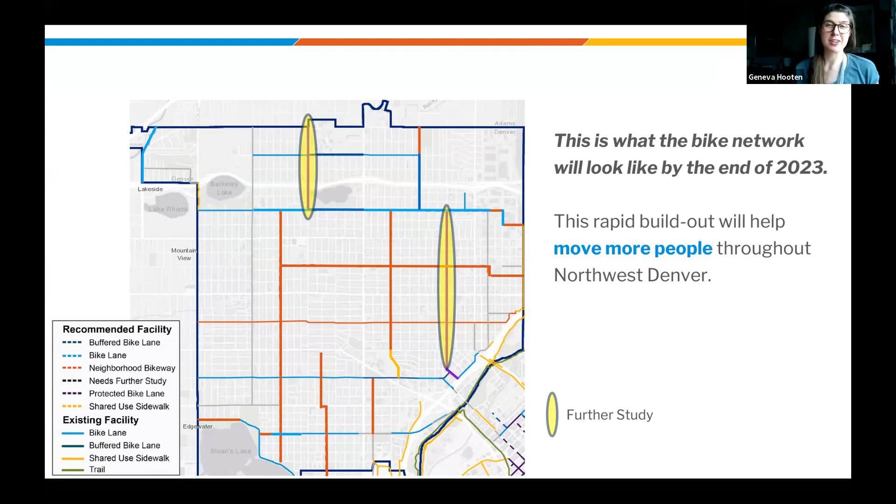Ultimately these are multimodal plans, but we have a ton of bike projects. This is what the bike network in Northwest Denver is going to look like by the end of 2023. And what the bike network looks like today is a lot less than this. So we're really excited about really building out a network for people to get around.

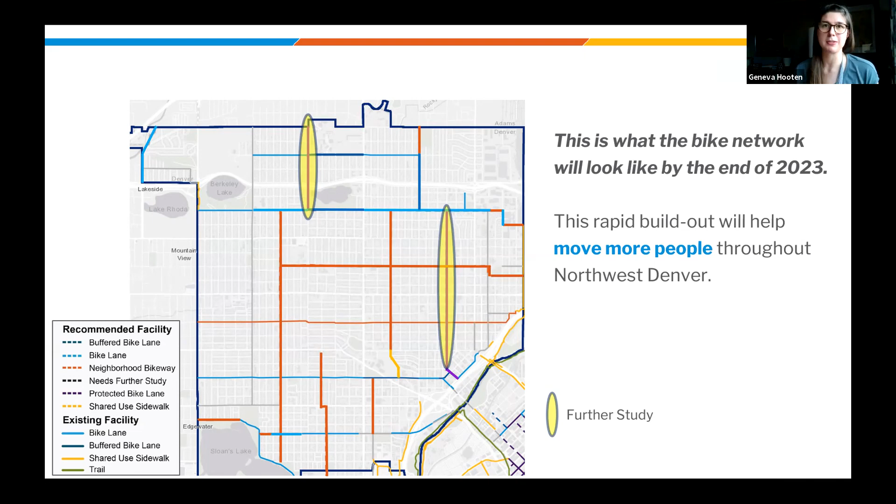And as we are working through all of this, our goals are always to be creating a safe city, part of Vision Zero of eliminating all serious injuries and fatalities across the city by 2030. We are working to prioritize multimodal projects. We want to rapidly deliver high comfort bikeways, provide more travel options for people to get around, so that we can better fit all the people who are moving to Denver and who deserve good ways of getting around the city. And we ultimately want to move more people.

So tonight I am going to just be walking through a couple of the corridors. For those who were at the North Zuni meeting earlier this week, a little bit of this is going to be repetitive, as well as if you were at the April 7th meeting. But we do have a few new things to share.

So first, we want to talk about West 46th. So this corridor, we have a bunch of different facilities going in. Starting at Tennyson, it's a bike lane, then it becomes a buffered bike lane, switching to a bike lane again. We have another very short segment of a buffered bike lane just east of Pecos, and a block of a neighborhood bikeway turns to Lipan, it's a bike lane, and then it's a neighborhood bikeway for the very last few blocks.

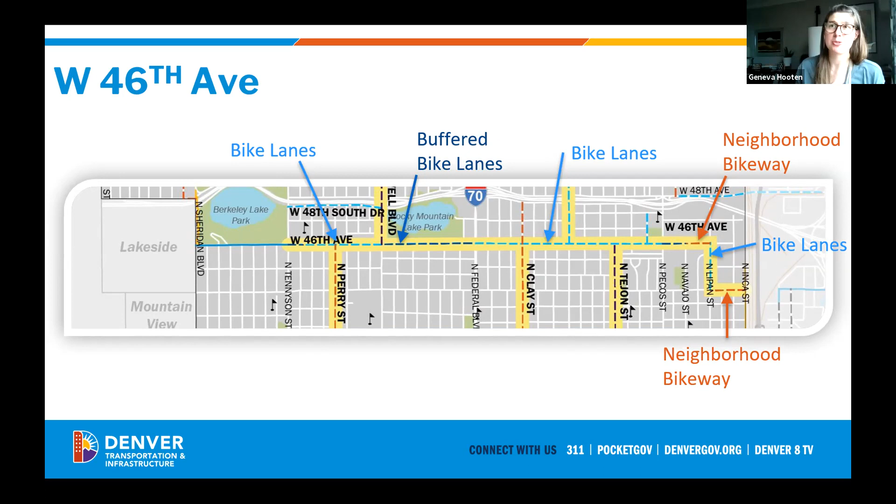So when we're talking about 46th Avenue, the other complication for this corridor is that it's actually in two different segments. And the very first phase is between Federal and Lipan, and that is going in really soon, like the next couple of weeks. So we're excited about that. That was the portion that was resurfaced I think last August. We missed the construction window to really put down the bike lane, and so now we're able to do that.

Now the other pieces of the corridor, between Tennyson and Federal, and then Lipan down to 44th, those we have at 60%, and that's what we shared through the Konveio tool. For those who aren't familiar with that, that's where after the April 7th meeting, every single 60% design that we have for Northwest Denver was online, and folks could go in, add comments, questions, and we have exported all of that. We closed that last Monday. So what you're going to see tonight is just at a really high level, what we've heard. The team is still digging into those comments, and we're going to continue to evaluate what we can address and some things we just can't.

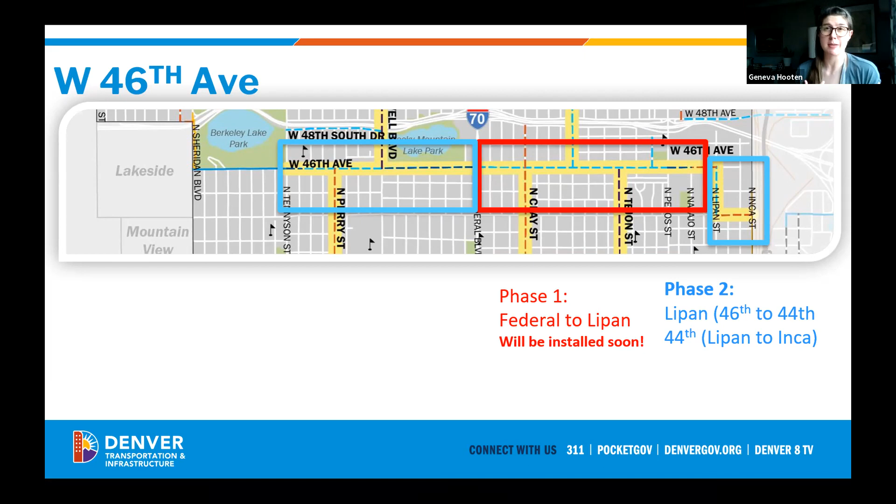So for the segments that we had on Konveio, we heard a lot about the crossing at Federal, which isn't terribly surprising. Folks really do want better signal timing and detection. We heard about some visibility concerns generally, and then some concerns about making sure that if there will be parking removal, that the removal is on the business side of the street where it's more utilitarian, not on the DHA side.

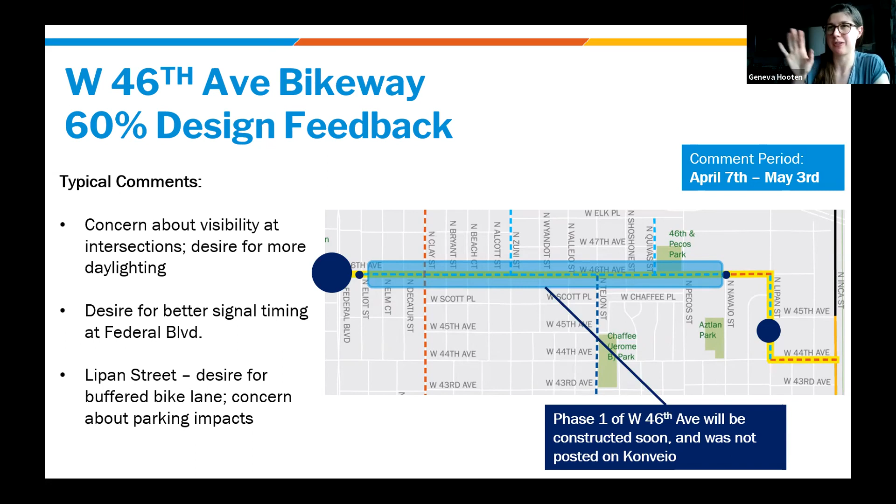So that's at a high level what we heard, and this is just for what is in the Sunnyside neighborhood. For Zuni, this is a different install mechanism in that Zuni Street north of I-70 is getting resurfaced, we think in June, maybe into July. Because of that, we have an opportunity to put in what was identified over 10 years ago in the citywide bike plan, with some modifications.

At the very northern edge, between 50th and 52nd, this will be a neighborhood bikeway. From 50th down to 46th, we have a little bit of extra space because of how the street is laid out, so we're going to use that space by narrowing the travel lanes to add a buffer.

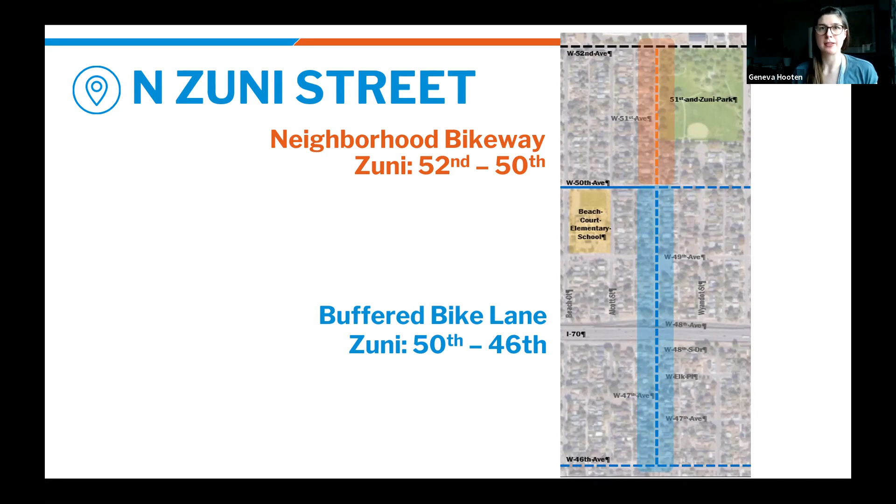Some of you may have participated in a survey that we had open recently. Between that and other things we've heard across the city and in this neighborhood through stakeholder meetings and our input map last spring, we've had about 90 comments, and 87% of them are safety related, whether about speeding or crossing tough intersections. Specifically, folks identified that 51st and Zuni is a tough place to cross, as well as 52nd and 50th under I-70, particularly at the signal, and then 46th as well.

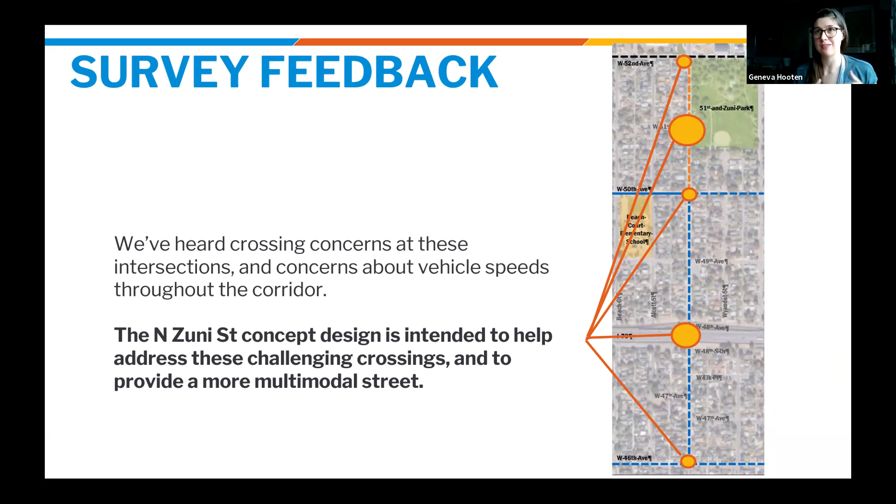So the concept design we have and that we're moving forward with is really intended to address these challenging crossings and to make Zuni overall a more connected and multimodal street, because we know how important it is in the network to connect 46th to 50th and then up to 52nd.

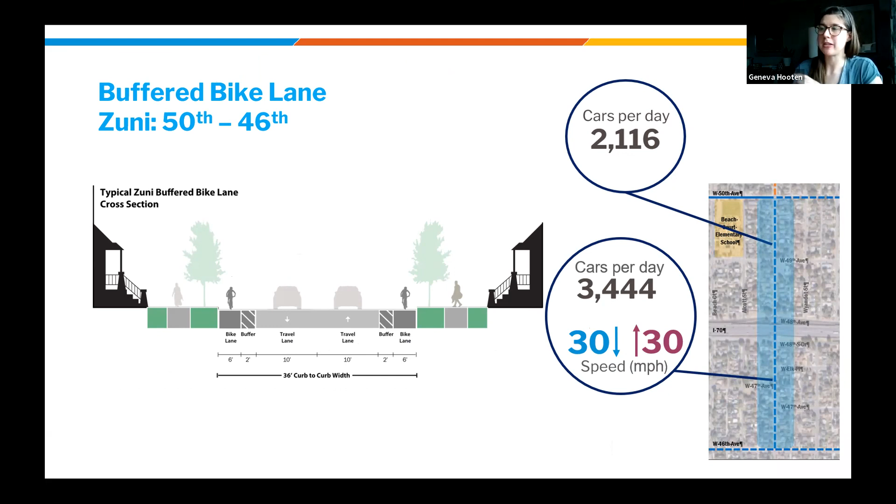I'm not going to spend a ton of time on this since a number of you were at the meeting earlier, but we can always come back. Ultimately, the volumes and speeds are right in alignment with a buffered bike lane, and what that's going to look like you can see at the top of the screen - that's our typical cross section with a bike lane, a buffer, and the travel lane.

There will be parking removal proposed through this design between 46th and 50th in order to fit everything. Across 48th we have some conflict markings. Under I-70 it's kind of a no man's land today - it's really wide without a lot of delineation, so we'll be adding in bike lanes and dedicated turn lanes, and that buffered bike lane cross section continues south of I-70.

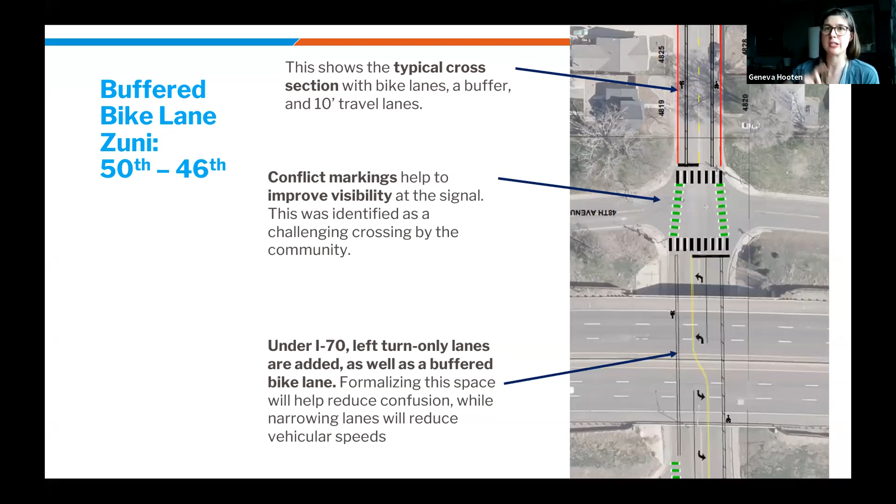In the northern part of the corridor between 50th and 52nd, here we have fewer cars per day and the speeds are just as high, if not higher, particularly in the northbound direction. So for this, with a shared condition and creating a neighborhood bikeway, we really do need additional deflection measures to make sure those speeds are safe.

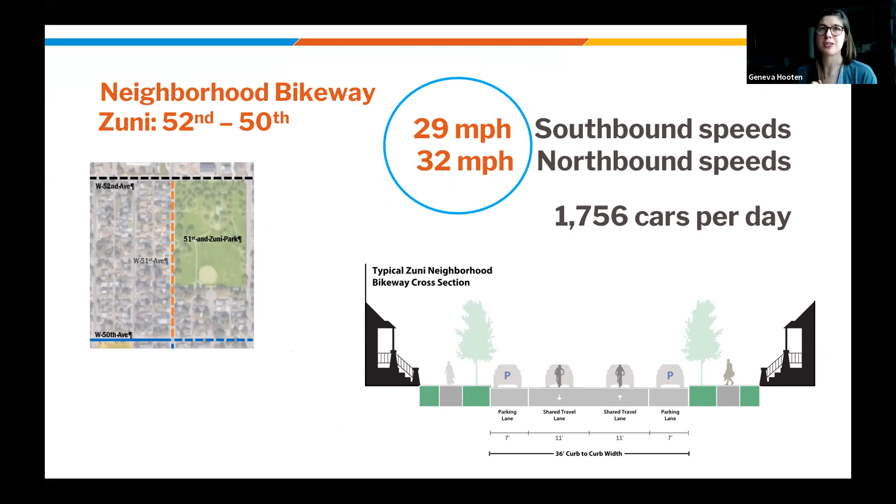So how we're proposing to do that is by adding curb extensions and median crossings at 52nd, which will help shorten that crossing. There will also be a sidewalk going in at the very northern side of the park later this summer - not part of our project, but good for everyone to know.

And then we will be adding a chicane between 52nd and 51st. This is a newer treatment in Denver, and what it does is calm traffic, mostly by forcing this gentle turn in the street. We're excited about using it - we think it's especially going to help because of the speeds we're seeing in that segment.

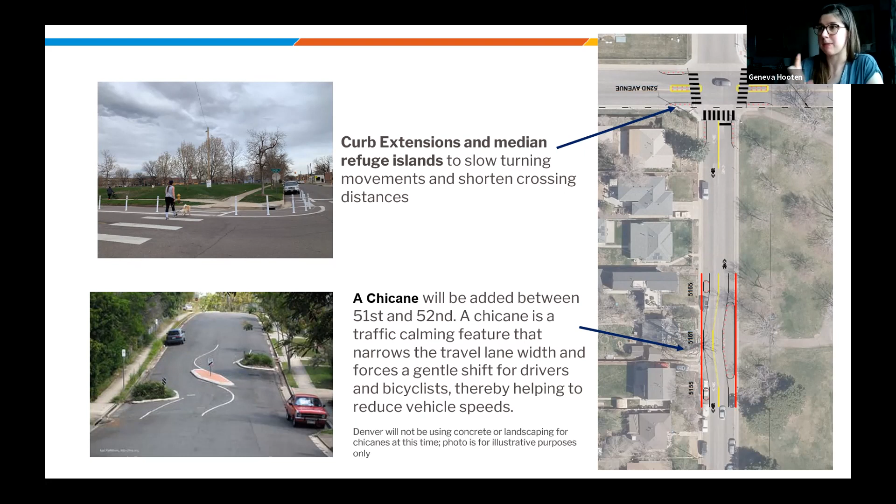Similar to 52nd, at 51st we're adding some curb extensions and median crossings to really help people cross there. All of those things will slow down cars as best we can and add some deflection, and hopefully that's not only improving things for people biking, but also improving pedestrian conditions.

And then we have a pinch point. What this does is add some friction on the street, making it so only one car - or one car or bike - can really traverse at a time. This forces people to yield to each other, much like what you see on a very parked out, narrow street. A pinch point also provides some of that traffic calming.

So that's all I'm going to share tonight for Zuni. This is the corridor that, because it's a paving corridor, we are moving forward with, and install is anticipated for this summer. I'm not sure exactly when, a lot of that is dependent on weather and when our crews can go out there. So we're excited about that, and let us know if you have questions.

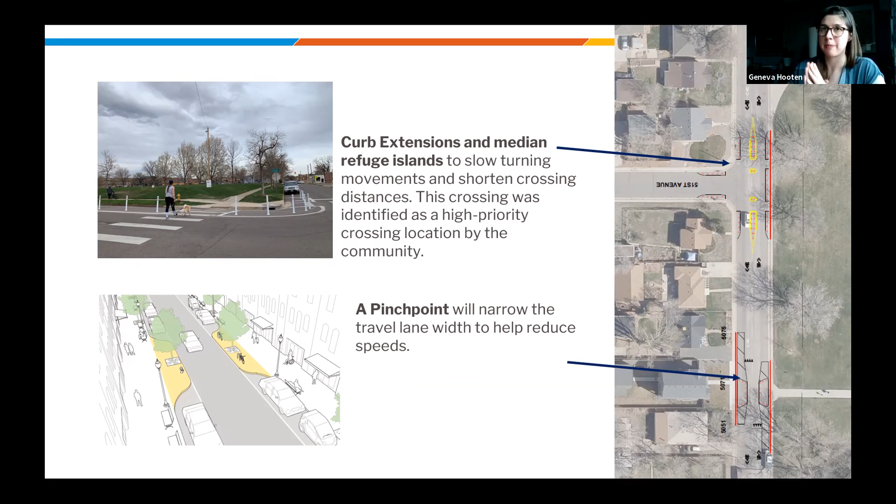For 41st, this is a full neighborhood bikeway corridor from Perry. It goes straight over, and then we kind of jog down to 40th at Navajo. This corridor is interesting because it crosses tons of schools. It's also signalized at Federal, but not signalized at other places, and it provides a continuous east-west connection. Particularly, it provides something for folks who want to bike east-west without going as far south as 35th or as far north as 46th — an intermediary connection.

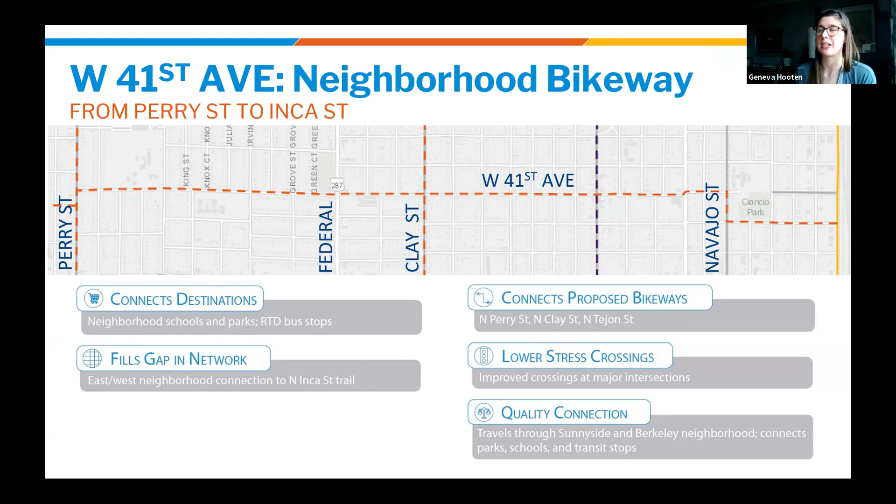Across the whole corridor from Perry to Inca, there are 7 traffic circles and 15 intersections with curb extensions to provide additional pedestrian benefits. We are adding bike detection at Federal, pedestrian refuge islands at Perry and 41st, and also at Pecos.

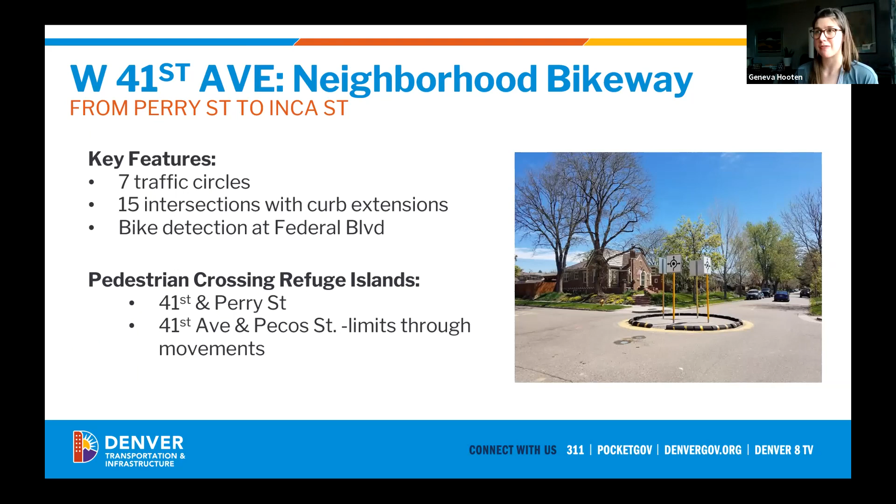What has changed in the 60% designs, which you all had an opportunity to see last month, is that we added additional corners or intersections with curb extensions, because we wanted to make sure we were limiting speeds as much as we could. We also added additional traffic circles, and we removed the speed cushions that were in the concept design because of working through a pilot program across the city.

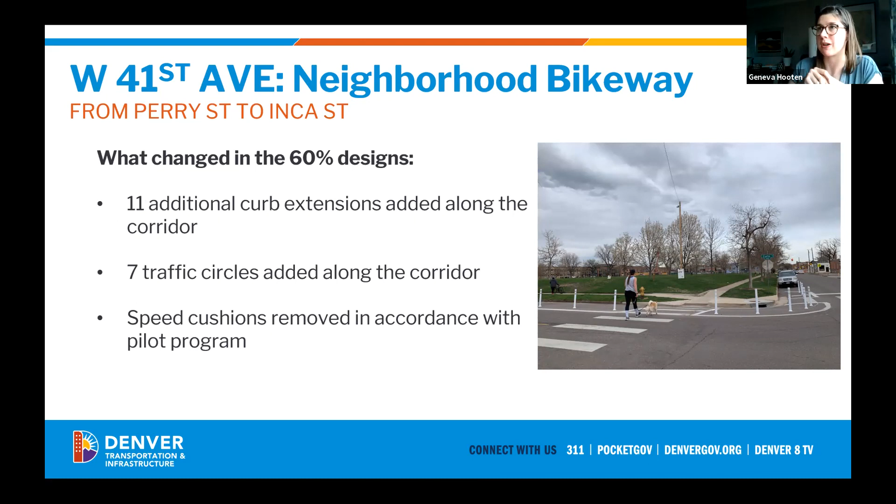The comments we heard on 41st were generally very supportive. We had some questions about impacts to nearby school operations. In the Sunnyside area, we had quite a few comments at Navajo itself, and about how this interacts with Trevista. You can also see at Lipan we had quite a few comments. Our team is still digging into these, but that's kind of where they all fell. I do think it's interesting that we had very few comments between Pecos and Alcott — only 1 or 2.

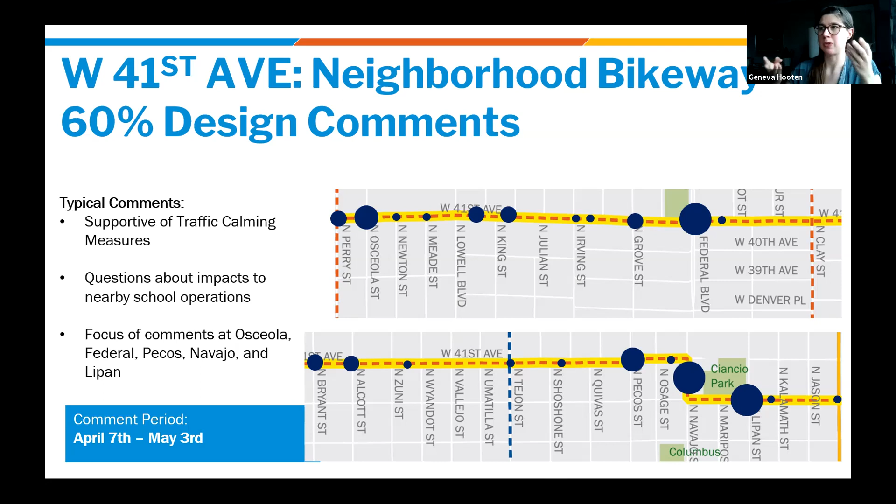Clay Street is another neighborhood bikeway corridor from 32nd to 46th. Similar to 41st, this has traffic circles and curb extensions. We're adding some pedestrian refuge islands, and we're also adding some diversion elements because the volumes on Clay are too high for a neighborhood bikeway. So in order to keep that character, the diversion is needed.

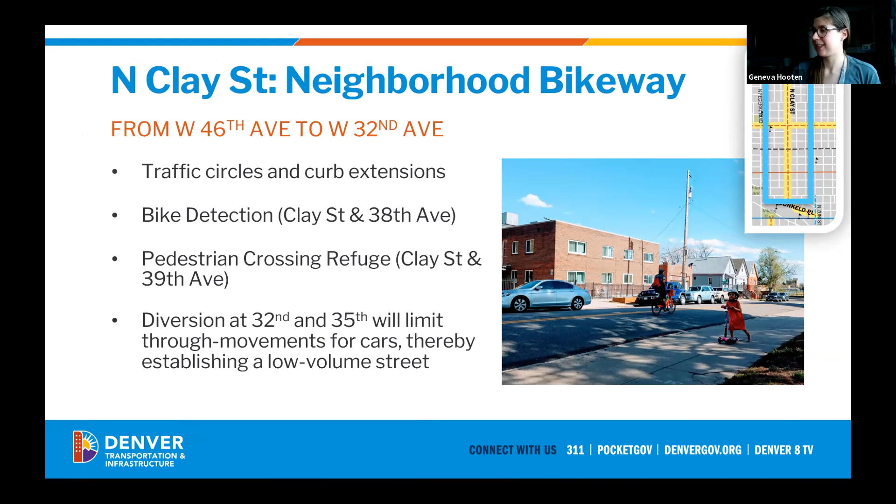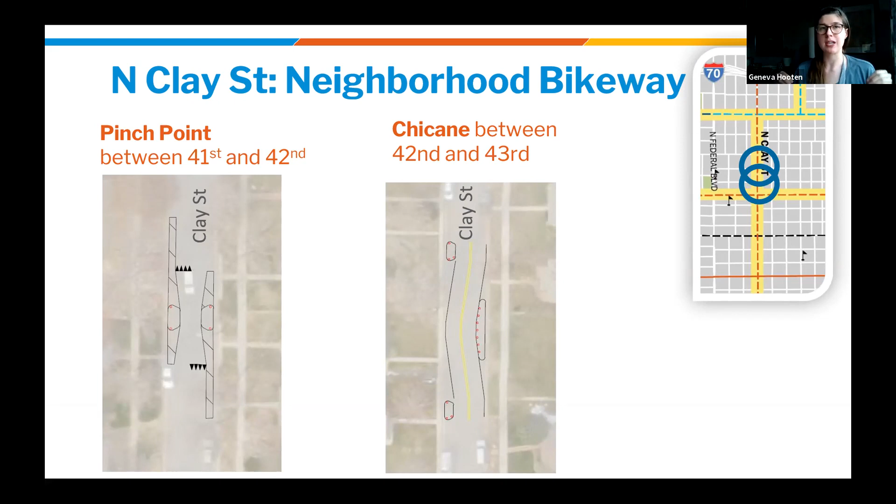Similar to what I showed you on Zuni Street, we're also piloting 2 new treatments. One is the pinch point, which will be between 41st and 42nd, and the second is a chicane between 42nd and 43rd. These 2 treatments together will provide more mid-block speed reduction, which is really important, particularly on these long north-south blocks that are typically about 600 to 660 feet long — long enough that a car can really pick up speed. So only focusing at the intersection isn't necessarily enough.

Sorry, those slides — I'm sorry, those are my draft slides.

At Clay, our comments in your neck of the woods, we had quite a few about the crossing at 38th, then some questions about the chicane and the pinch point, and quite a lot around 44th. At 44th, we are proposing curb extensions, and we've heard from various neighbors on that. You can see that it's really that block or two between 43rd and 45th where we have a lot of comments. As I said, our team is still digging into these, and we'll be seeing what we can incorporate into our final designs.

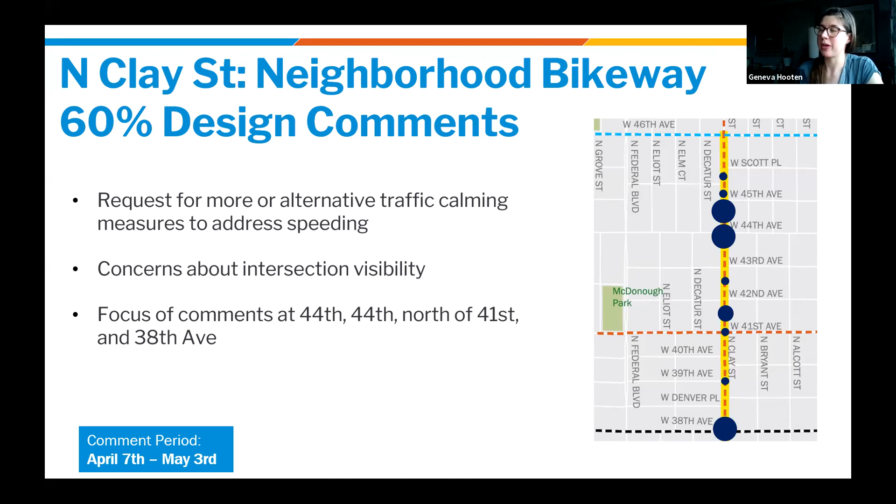And then the last corridor that I want to update you all on is Tejon Street. I'm sure you're all familiar with the progression of this. At a high level, Denver Moves had identified Tejon as a protected bike lane. We moved forward through a lot of outreach with a protected bike lane concept, and also heard a lot about the impacts to neighbors and small businesses.

That's because of the full parking removal. So what we're doing right now is pausing, reevaluating, and collecting additional data on Shoshone and Quivas. We are going to continue to work with the public, neighbors, business owners, and stakeholders on evaluating all of these alternatives and coming to one that works for everyone as best we can. That additional data collection and outreach is ramping up. We expect most of that to happen this summer, probably into the fall as well.

So we don't have a whole lot new to share about Tejon, but we know it continues to be a corridor that a lot of folks are interested in. And we know that this particular north-south connection in this part of the city is really, really important.

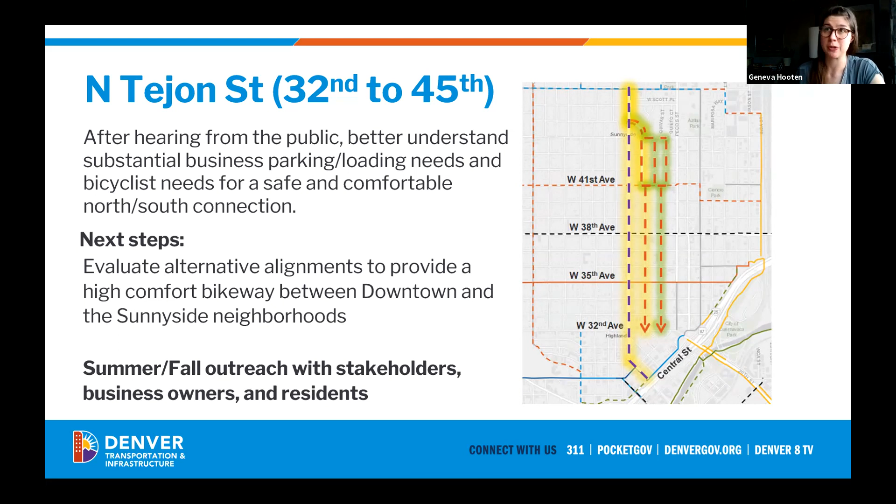And just at a high level about our implementation. West 46 at one portion is going to be constructed early this summer. Zuni, we expect to go to construction at some point in the summer following repaving. And then I listed out those other corridors: Sunnyside of Clay, 41st, and the rest of 46th.

These are going to go into construction sometime between, we would say, late 2021 into 2022. Much of this is dependent on how quickly we can finalize designs, but also contractor availability, how these get constructed. There are tons and tons of factors at play here, so we have to keep it really vague. At best, some of these will go in this fall. If not, they're going to edge into 2022.

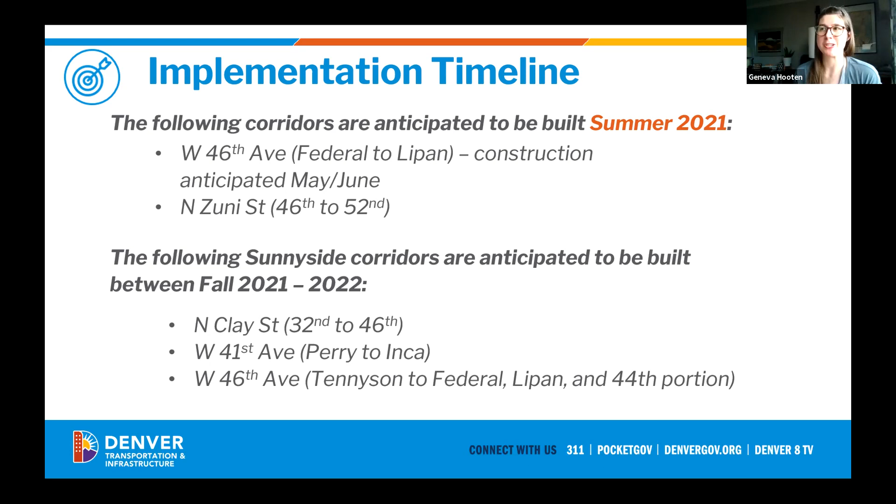And before I stop sharing my screen so I can see all your faces, just a reminder of how to stay engaged with the process, knowing there are so many different projects going on. We try to keep our website updated, and you can get to it through the bit.ly there. We also have office hours with me and my colleague. You can email Denver Moves at denvergov.org.

We try to get back to folks within about a week, sometimes a little bit longer, but we definitely are checking the email inbox. And if email doesn't work for you, you can call the project hotline and someone from the project team will return your call. So with that, I've just talked at you for 15 minutes, and I would love to hear if you have questions or comments. I'm going to stop sharing my screen.

Thanks, Geneva. Go ahead, Bill. No, I was just going to say, I have to believe there's comments and questions, and I can't believe that Phil's not going to go first.

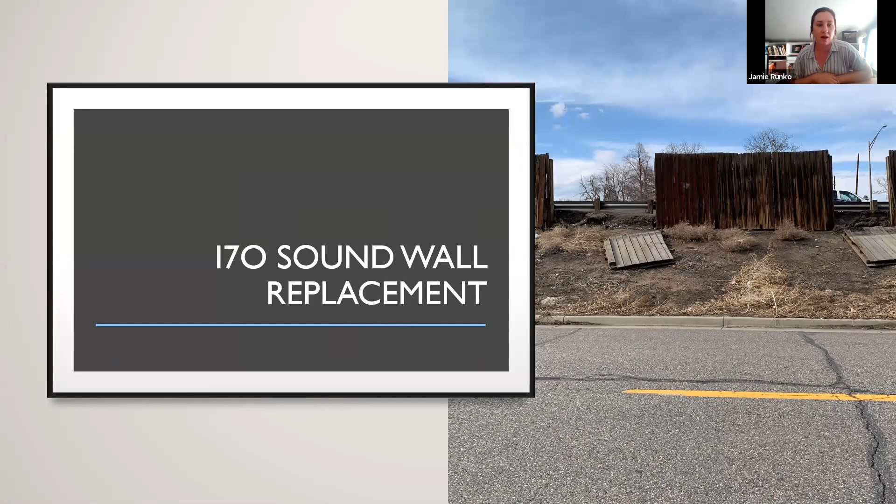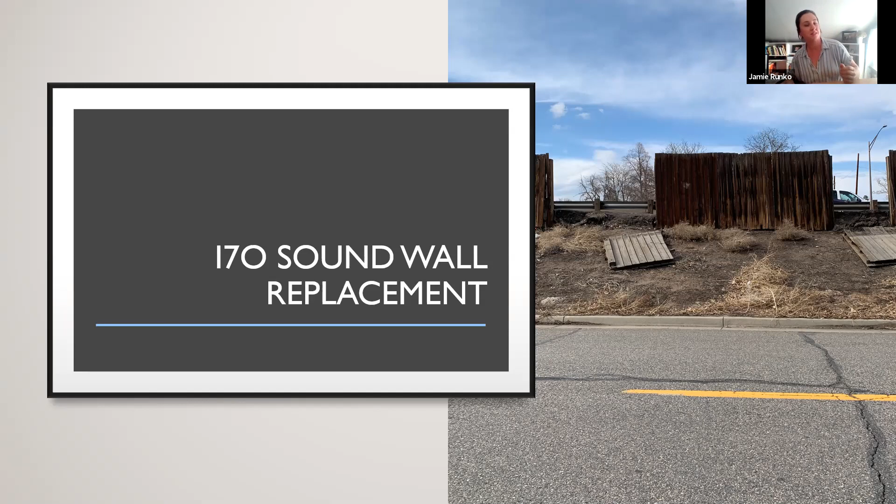Perfect. So you guys see my view every day from my neighborhood. I moved to Sunnyside, I am just a Sunnyside resident trying to get this off the ground. I moved here in 2013. I absolutely love the neighborhood. I really just expected, honestly, when I moved here that this wall would not be a problem anymore. It was in such disrepair that, of course, within a couple years, they would replace it with something effective, right? 10 years later, that has not happened. So this is what our neighbors and myself look at pretty much day to day.

So currently, CDOT's plans, they do have plans to replace the wall. It is 4 miles, so yes, that's super extensive, that's a lot of work, it's going to take a lot of funding. So far, the only portion of it that's funded—I don't know if you guys can see that little yellow area—that is from Tennyson to Lowell. Thank you, so really, really small portion of it funded. They do have plans to complete the whole entire thing, but no timeline, no money thrown at it.

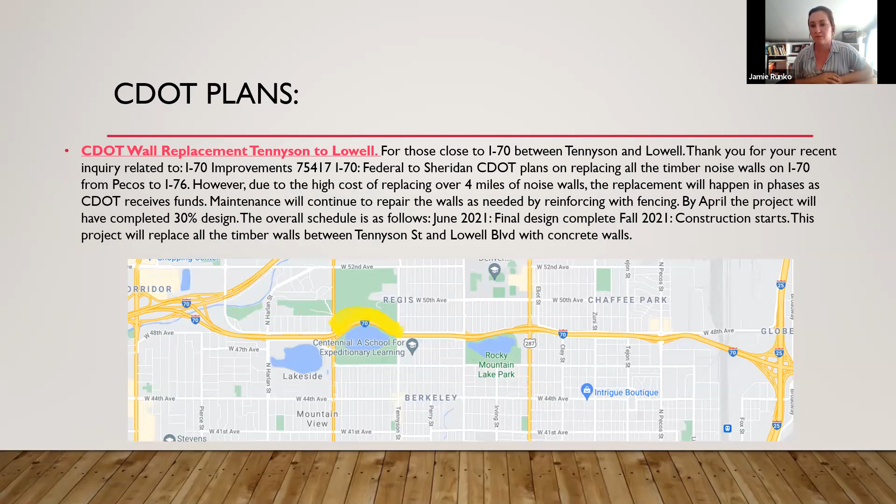I check with Julie George at CDOT frequently, and they really have no idea when that's going to happen. My plight and my motivation for getting the neighbors together is really just to encourage our legislators to fund this project. It needs to be done.

Also, they're not effective. This is supposed to be a sound barrier. How can a sound barrier work when the walls continuously fall down? In addition to falling down, this has happened several times: cars actually come off of I-70 and onto West 48th Avenue, which is terrifying. People walk their dogs there, I run on that street. I just think the community needs something more effective in keeping us safe.

So my goal in getting all of this together—I've been pretty active on Nextdoor, we do have a Facebook group. I want to get the support of you guys, the support of Chaffee Park Neighborhood Organization, who I've been in touch with. They're very supportive of our outreach. I'd like to potentially start a neighborhood petition advocating that we really fund this project fully. I'm open to any ideas you guys may have. I'm not a politician, I'm just a resident. I don't know the best way to get this done, but I think our community deserves better, and hopefully with us advocating for that, it'll happen sooner rather than later.